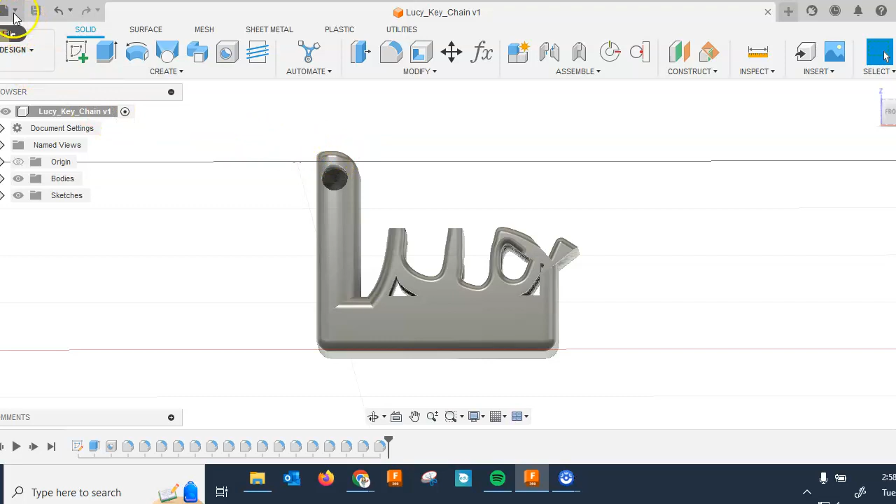Alright, so now you can see that I have it saved. In order to export it, go over to the file button here, and go to the drop down to export. As you can see, it brings up the name you've already saved your file as, and it shows as Autodesk.f3D, which is compatible with Fusion.

However, our printers are Dremel printers, and the easiest way to change things is by scrolling down and looking for the STL file option, and you're going to click that. We want to go ahead and export it there.

As you can see, it just takes a few minutes to upload. While it's uploading, I'll talk about what we're going to do next: I'll show you how to save this to your Google Drive, and then you can share the link with me. I'll also show you how to save it on a flash drive, which makes my life a little easier as I go print these files out for you. So as you can see, it says complete.

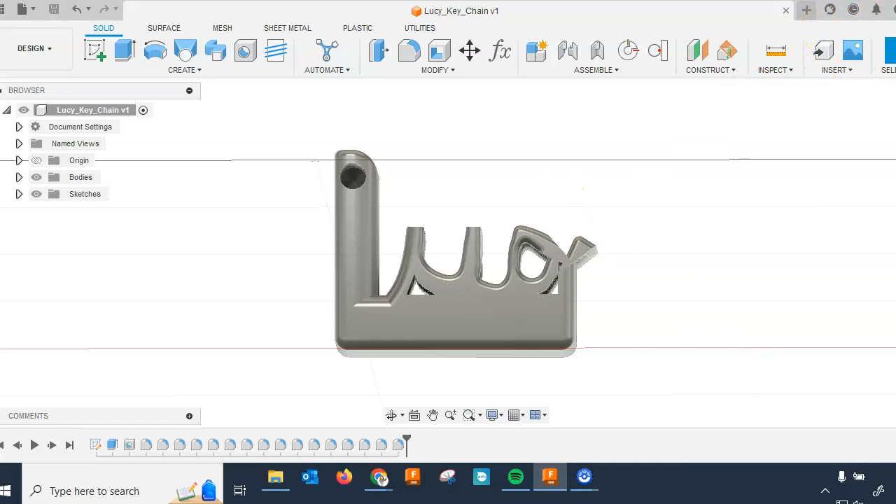Hooray. I'm going to close this and make my screen a little bigger. Alright, I'm going to exit out of Fusion, and I'm here at my desktop. So let's open up our file here, and I'm going to open into my Google account, hopefully you've created a folder for this class.

So we're going to go ahead and save that. Let me show you a couple of different things with that. I'm going to go down to my IED class, fall 2023. Yours might be set up a little differently, and that's okay. I'm just going to open up Unit 2, and we're going to do a file upload.

So we're going to do file upload. If you go to your downloads, which mine already pulled up, you've got a whole bunch of different things. We want to go to our downloads because that keychain just downloaded for us. So we're going to open that up, make sure it says all files, and we are going to save that there.

As you can see, it popped up in this weird box here. That is okay, that's actually an STL file, our computer's not going to read that very well. But this allows you to do a control, and then you can share the copy link with me. So you're going to copy that link, and then when you go to the actual assignment...

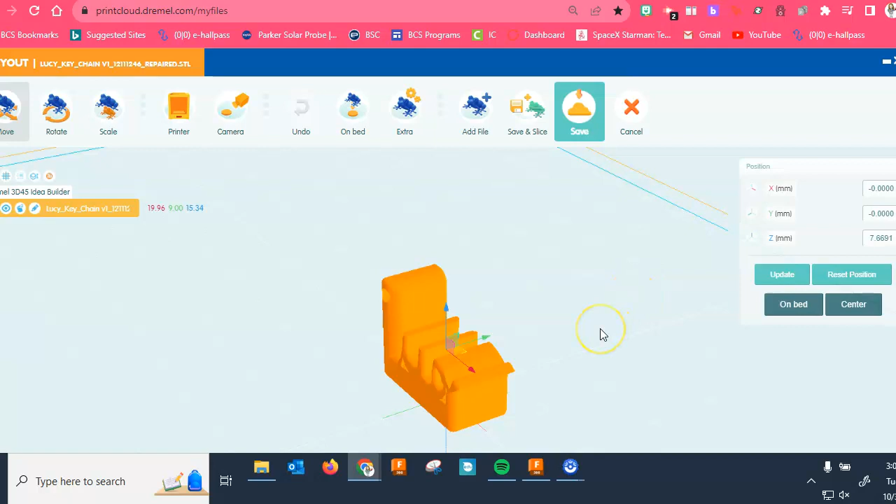And so why units was important is that when we go in here, it's going to ask me to fix my file, but the program is actually just going to go ahead and do that for me. Then when I go to layout, you can see that it's there. Pretend that this is the actual printer bed, imagine this is the whole Dremel printer. It's about the right size, not too huge. It will let me rotate it so we can print it on, get it a bit there, on the back side.

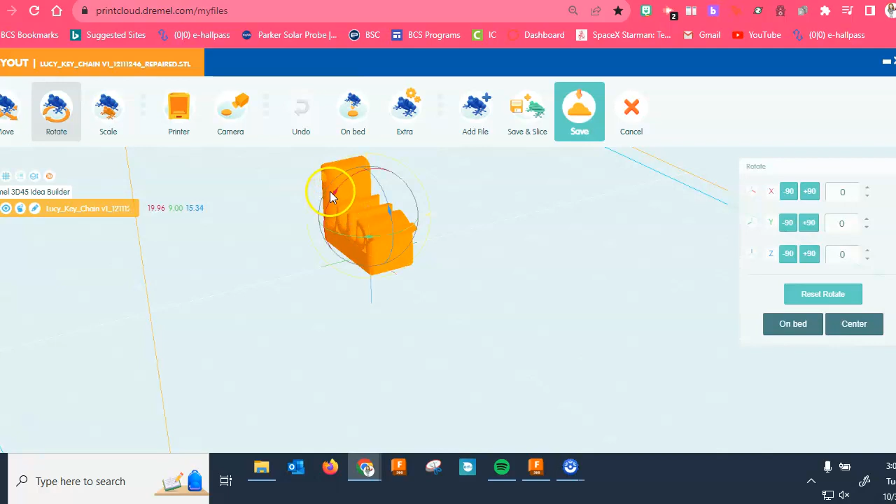And then I'm going to center it on the bed, and looking at the scale, I think we're okay. So again, I'm going to orbit around here so you can see what we're looking at. So there it is again.

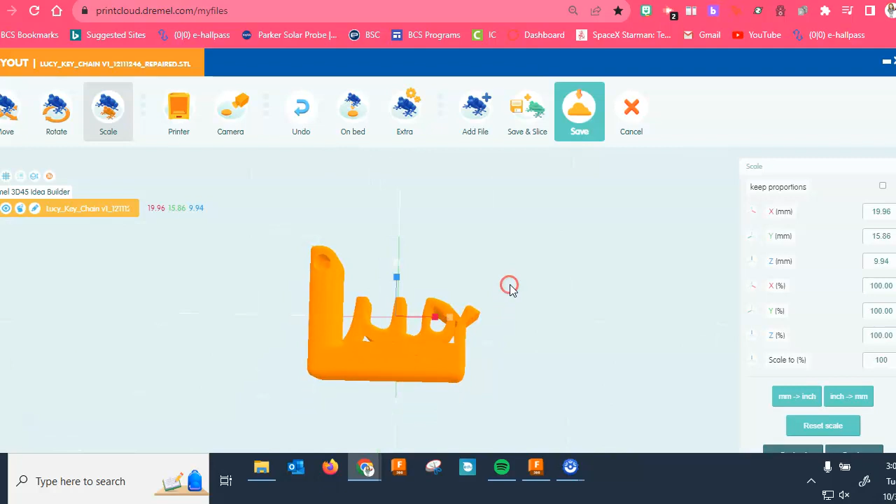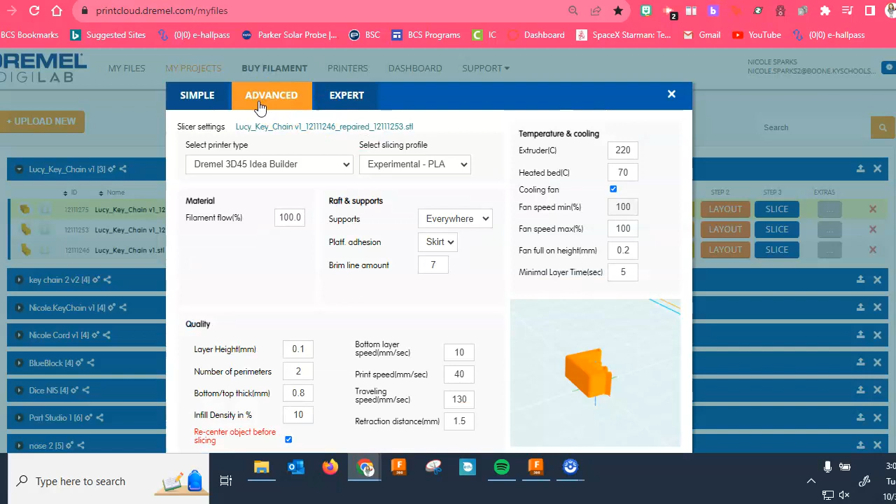Now obviously it's not going to print in that color, but we get the idea. So then I'll hit save and slice, and that's going to allow me to print it. It's going to make it into, so you can see a couple of different things with it, allowing me to say okay, well there's my file, hooray. We'll check a couple of things, make sure we're in that PLA.

That's just our plastic filament. And then I'll normally change the layering height just to make it go a little faster. So we'll do that, and then I'll hit slice, and it's going to change it into the g3drem file, and that's what's going to allow me to print something.

So once again, you don't have access to this part. You can actually open files and look at it, but for the most part, I just really need to make sure that we get that export STL. So hopefully this was helpful. Thanks.